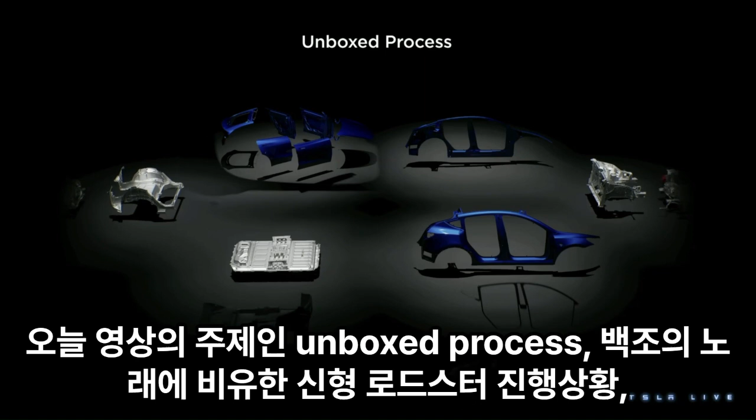테슬라가 자율주행, 로보택시, 옵티머스, 세마이 트럭 등으로 큰 도약의 순간에 있다고 강조했고 특히 세마이 트럭에 대한 개인적 기대감을 표현했습니다. 오늘 영상의 주제인 언박스드 프로세스, 백조의 노래에 비유한 신형 로드스터 진행 상황, 사이버캡과 자율주행, 모델 S와 X 리프레시, 테슬라의 엔지니어링 문화와 팬 커뮤니티, 그리고 저렴한 모델 등에 이르기까지 테슬라의 주요 현안에 대해 솔직한 인터뷰로 주목을 끌었습니다. 주요 이슈별로 발언에 대한 자막 및 추가 코멘트 형식으로 업로드할 예정입니다.

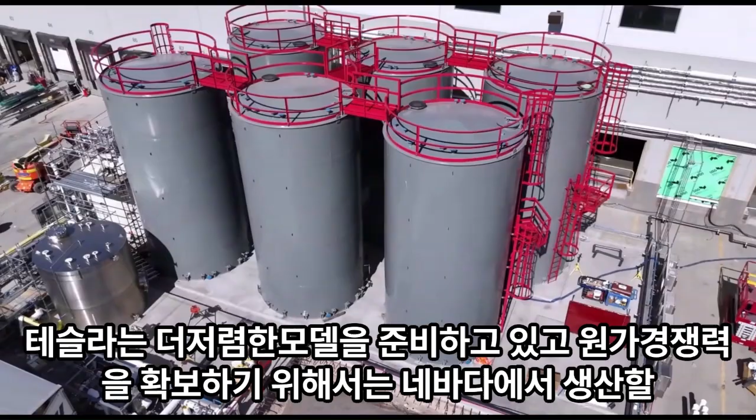테슬라는 더 저렴한 모델을 준비하고 있고, 원가 경쟁력을 확보하기 위해서는 네바다에서 생산한 자체 LFP 배터리 셀과 언박스드 프로세스가 전제 조건일 정도로 핵심 중의 핵심입니다. 첫 번째 주제인 언박스드 프로세스에 대해 살펴보겠습니다.

Tesla's introduced the unboxed manufacturing process. Can you walk us through what that means from an engineering standpoint and how that changes the way vehicles are designed and assembled? Yeah, I mean, crazy idea. Where's Sandy? I see him. Good idea, right? Good idea? Yeah. I mean, when you build these machines and you realize how inefficient they are, like in terms of getting in and out of it, a car is built around a human.

So when you're assembling it, you have this big void of space inside the car where humans sit in the end. That means you have to carry that through the entire factory, and when you watch the body go down a body line and it's mostly air, you're like, what am I doing? Why am I? The capacity of this building is based on the air for the humans, and so we had this idea, which starts with smaller products.

You look at the computer industry, and they build all these small subassemblies, and they put them into layers in the big PCBA, and then the PCBA goes into a case, and all of these lines come in through these arteries, and they feed a really small main line. And we said, why can't we do that with cars?

A lot of people said, well, the structural load paths go through the A-pillar, they won't be able to support crash. And then other people said, you won't be able to get the precision, and you need a slip plane here. And I was like, no, those aren't reasons.

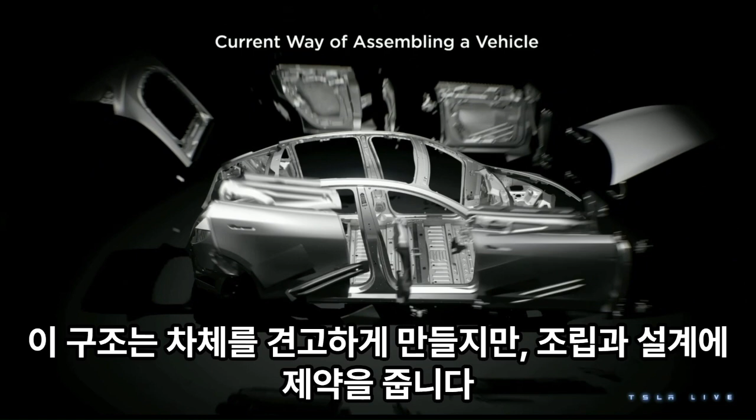전통적인 자동차 구조는 A-필러, 즉 앞유리 양옆의 기둥을 통해 무게와 하중이 전달되도록 설계되어 있습니다. 이 구조는 차체를 견고하게 만들지만 조립과 설계에 제약을 줍니다. 많은 사람들이 이 구조를 바꾸는 건 불가능하다, 정밀도가 안 나온다고 말해왔죠.

전통적인 자동차 제조 방식은 바디인 화이트 방식으로 차체 프레임을 먼저 용접하여 완성된 박스 형태로 만든 후 시트, 배터리, 대시보드 등 내부 부품을 나중에 삽입하는 방식입니다. 이때 차체의 강성을 확보하기 위해 A필러, B필러, 루프 등 프레임 자체가 하중을 지탱하게 설계됩니다. 그래서 A필러는 차량 전복이나 충돌 시 탑승자를 보호하기 위한 중요한 구조적 부위이자 전체 차체 강성 설계의 핵심 경로가 됩니다.

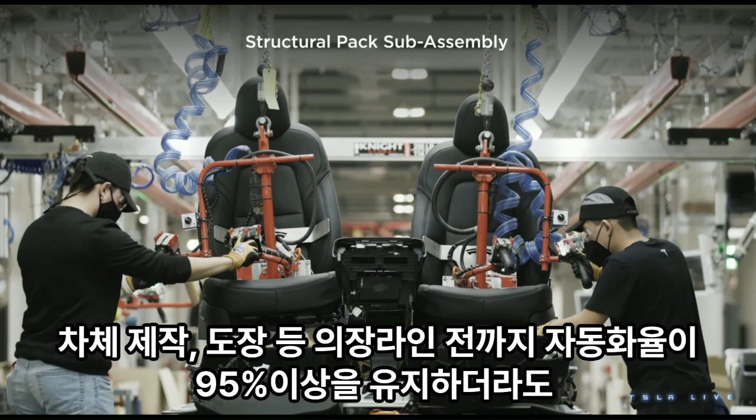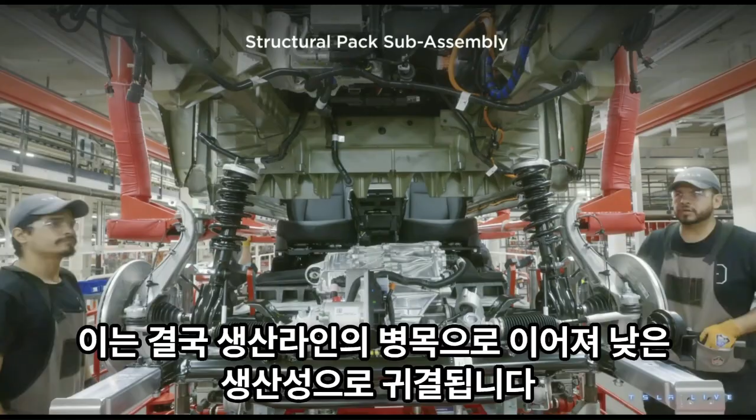하지만 이 방식은 단점이 있습니다. 조립 공정에서 사람이나 로봇이 내부에 들어가 작업해야 하기에 생산성이 떨어지고 자동화 라인에서 병목 현상이 발생하게 됩니다. 차체 제작, 도장 등 의장 라인 전까지 자동화율이 95% 이상을 유지하더라도 결국 마지막 의장 라인에서 자동화율이 현격하게 낮은 20%대로 하락하게 되고, 이는 결국 생산 라인의 병목으로 이어져 낮은 생산성으로 귀결됩니다. 부품을 넣는 구조라서 병렬 작업은 사실상 불가능하며 5m 차체 구조물 자체가 크고 무겁기 때문에 라인 공간 차지와 이동 라인도 비효율적입니다.

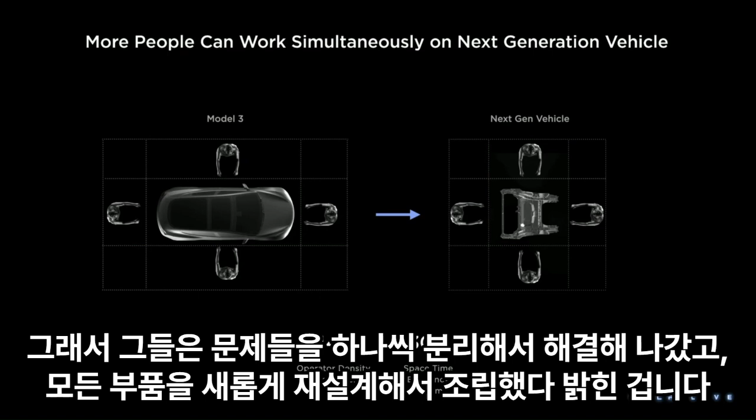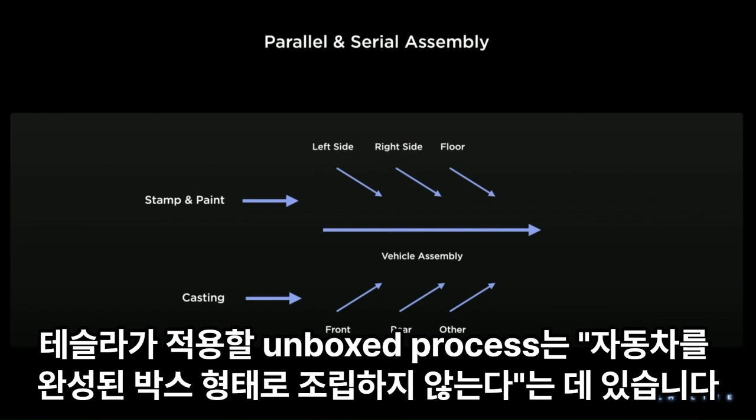라스와 팀은 그런 제약을 불가능한 이유가 아니라 극복 가능한 과제로 본 겁니다. 그래서 그들은 문제들을 하나씩 분리해서 해결해 나갔고 모든 부품을 새롭게 재설계해서 조립했다 밝힌 겁니다. 테슬라가 적용할 언박스드 프로세스는 자동차를 완성된 박스 형태로 조립하지 않는다는 데 있습니다. 기가 캐스팅으로 단일 주조한 전후면, 언더바디 그리고 스트럭처 배터리 팩을 따로 병렬로 조립한 후 마지막 단계에서 이들을 수직으로 결합합니다. 즉, 모듈 단위로 만들고 마지막에 합체하는 방식입니다.

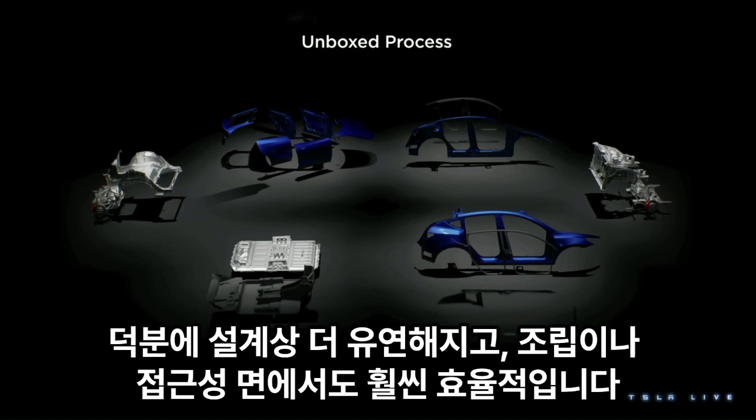기존의 선형 조립 방식의 비효율성을 해결하는데 큰 잠재력을 가지고 있습니다. 테슬라는 구조 하중을 기가 캐스팅을 통한 단일 주조의 전후면, 언더바디와 스트럭처 배터리 팩을 통해 분산합니다. 덕분에 설계상 더 유연해지고 조립이나 접근성 면에서도 훨씬 효율적입니다. 기가 캐스팅 단일 주조로 부품 수는 줄고 용접 공정은 최소화되며 차체를 더 단순하게 제조 가능합니다. 강성과 무게중심의 장점이 있습니다. 이 방식의 장점은 무엇보다 속도입니다.

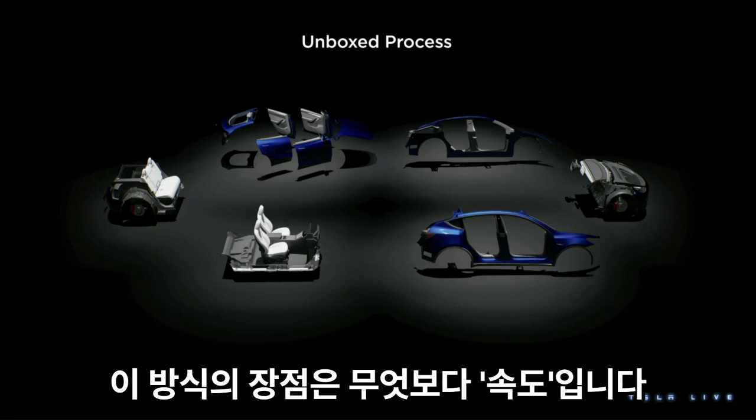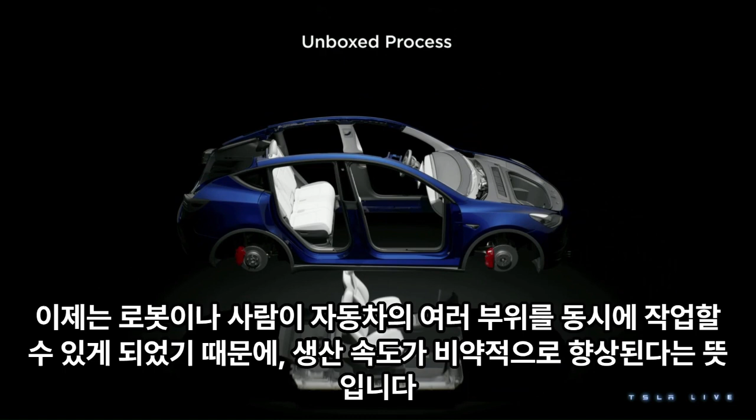기존에는 차를 조립할 때 순차적으로만 작업할 수 있었지만 이제는 로봇이나 사람이 자동차의 여러 부위를 동시에 작업할 수 있게 되었기 때문에 생산 속도가 비약적으로 향상된다는 뜻입니다. 테슬라가 밝히길 작업 공간을 40% 절감하게 되며 이는 기존 기가 팩토리의 제조 라인을 언박스드 프로세스로 일대 전환하게 될 경우 공장 부지 면적을 확장하지 않고도 이론상 2.5배의 생산 능력 증대가 가능할 수 있음을 의미합니다.

A필러는 차의 전면 구조물 중 하나로 충돌 시 차체의 강성 확보에 중요합니다. 라스 모라비는 이 전통적 구조를 깨고 모듈 방식과 병렬 작업에 완전히 새로운 조립 방식 언박스드 프로세스를 시도하는 중입니다. 기가 캐스팅은 또 하나의 제조 혁명입니다. 감사합니다.